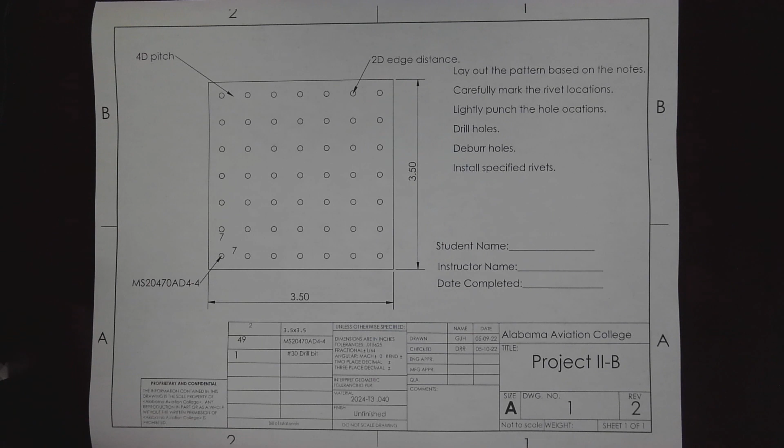We're going to take a look here at the second drawing in the second project. This is project 2B. Now this project ties into the first project. In the first project you are to cut 4 pieces of metal as precisely as possible, file them to size. Then we're going to use those projects for a couple of our rivet projects. So everything you did in the first one will apply to the second one.

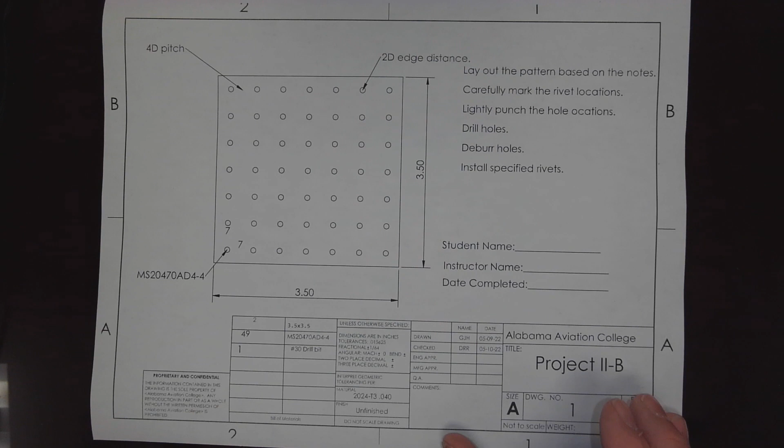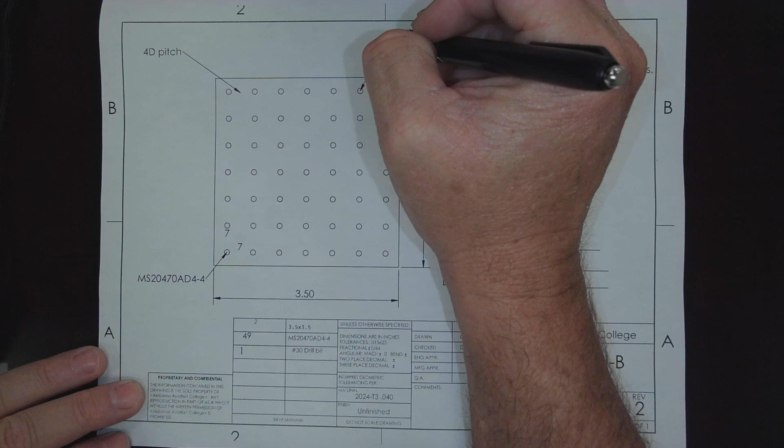And as always, before I jump in and try to key in on any one particular detail, I want to take a look at the drawing and look for any possible notes. Well, the first thing I see is lay out the pattern based on the notes. Well, we got some notes out here around our drawing, and there's some key terms that we need to look at. To start with, edge distance, ED. In this case, we got a rule of 2 diameters for our edge distance.

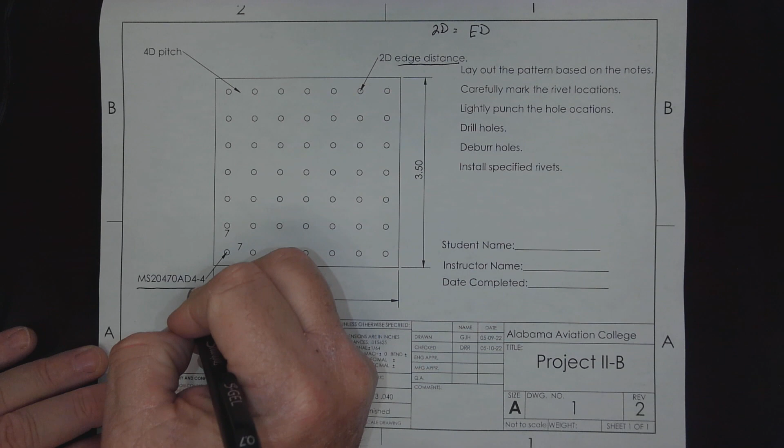Also over here, we have some information or a rule dealing with pitch. 4 diameters for the pitch. Well, that's good to know, but I can't really apply it yet. I need a tad more data. Well, look at here. We have a rivet part number. And according to this part number, this first digit, remember our diameter is always so important. A 4 rivet is the same as a 4/32 rivet.

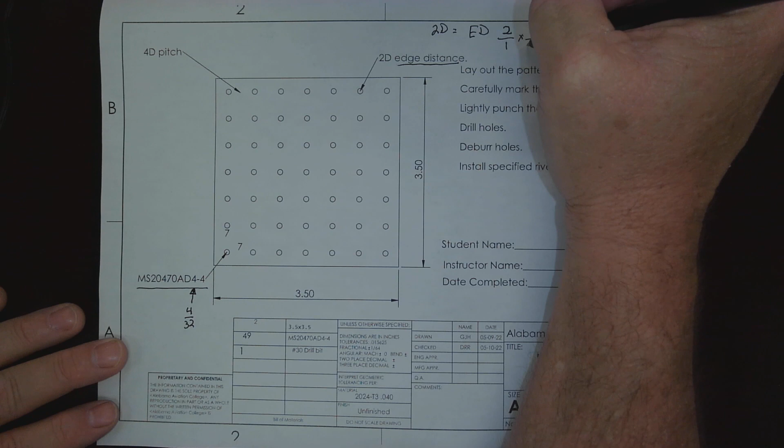Well, it just so happens that our handy dandy rulers, and it won't focus, but our handy dandy rulers have a 32nd scale. So when we apply these rules, we really don't have to convert anything. So if we know that a number 4 rivet is 4/32 and we have a 2D edge distance, well, anytime we use a whole number such as 2, it's understood that it's over 1. So we could simply multiply that by our rivet size, and by golly, we'd have 8/32.

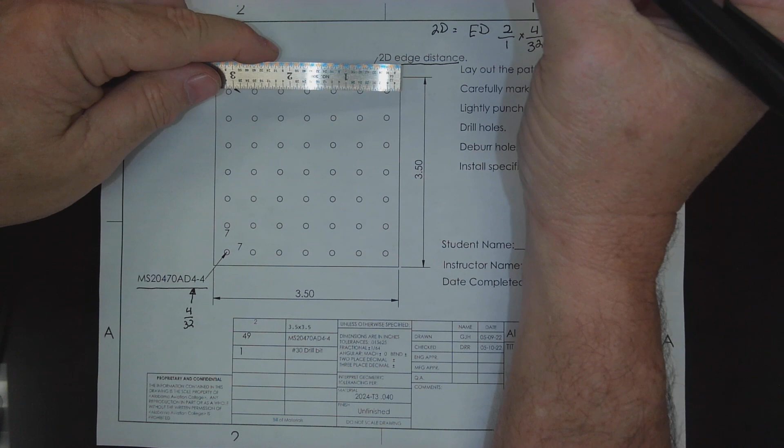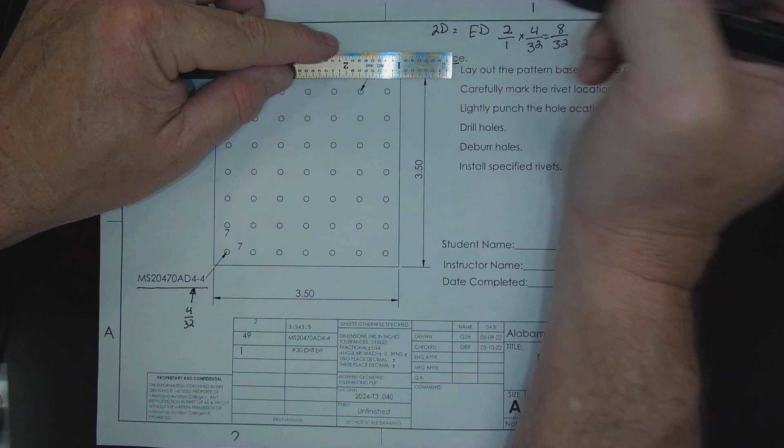Now, yes, this could be reduced to a 1/4 inch, but the fact of the matter is, since our ruler is designed to work in 32nds, we could simply place our ruler on an increment mark. I like to start with 1. Never measure from the edge of a ruler because the edge could get worn or damaged and throw your math off. It's way more accurate to measure from an increment. So I could start by laying out my edge distances at 8/32 all the way around my part.

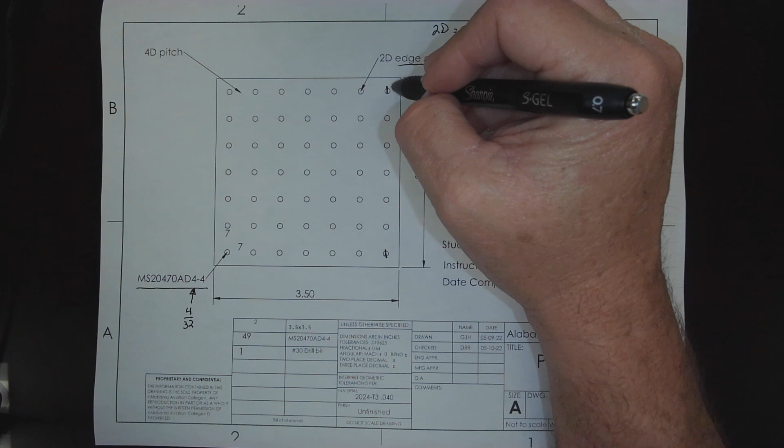If I do that, I will have established my fence. I like to call it a fence. I'm going to fence in everything that I'm going to lay out and drill. Anything closer than 2D to the edge, technically it is no good. It'll create a weak seam and the part would not be good.

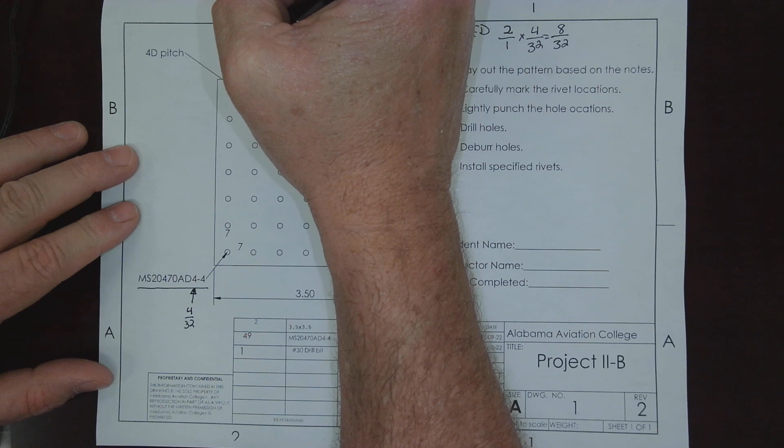The next thing I want to do is establish what my pitch would be. Well, once again, I have a pitch rule here. It is 4D, so that would be the same as 4/1 times our rivet, which is a 4/32. And look at here, I've got 16/32 for my pitch. And remember, my pitch is the space between rivets in the same row.

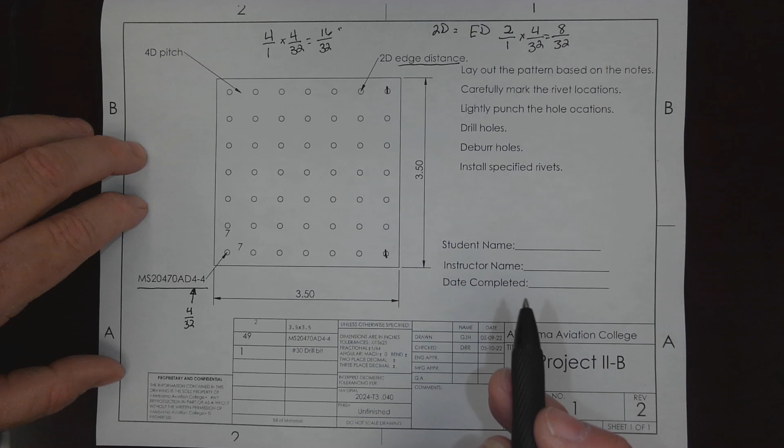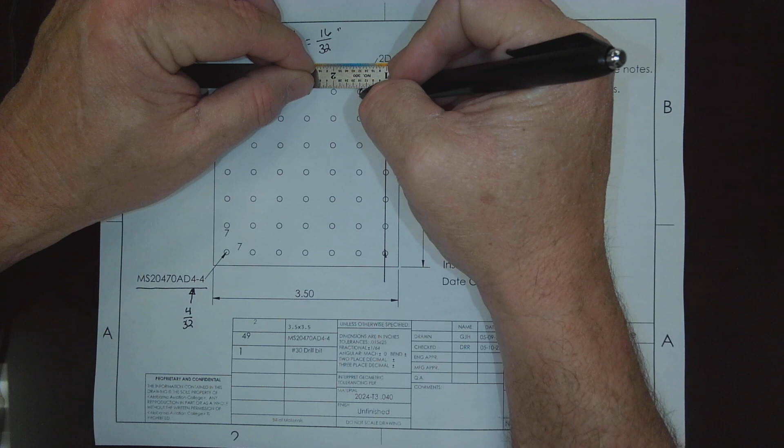So I could measure from my first line, my edge distance line, I could measure over on my blank metal. Then I could go to an increment. I'm going to cut 1 inch. I'm going to measure over 16/32, and look at this. By golly, it'll put us right in the center of where that rivet should be. I could do the same down here. We're going to measure over 4D, 4 times 4/32. That is 16/32, and I can draw a line.

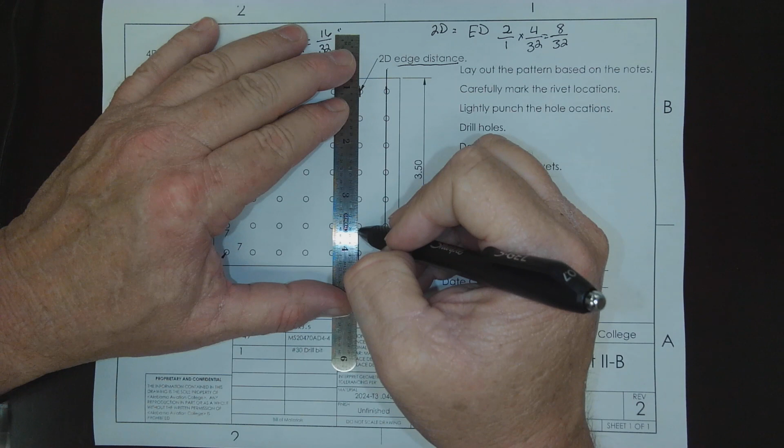So that helps us kind of get a good start. We're going to draw basically a grid. We'll do the same thing from all directions, and we'll end up with a lot of lines that'll intersect perfectly where our rivets need to be drilled and installed.

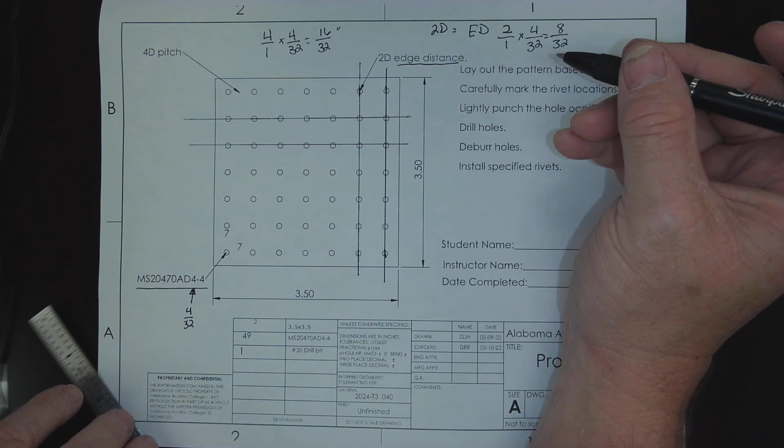Now, it's important that you take time while you're laying out these projects. Remember, Mr. Fine Point Sharpie is going to make a small enough line that we don't create a bunch of error by having a really wide mark on our metal. Well, let's look at our next notes.

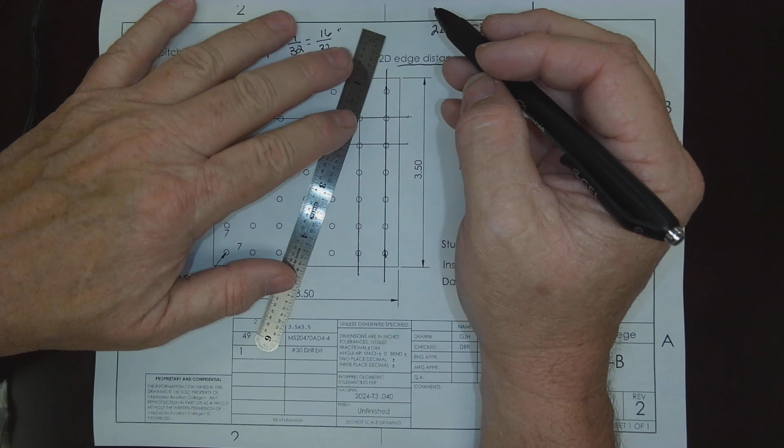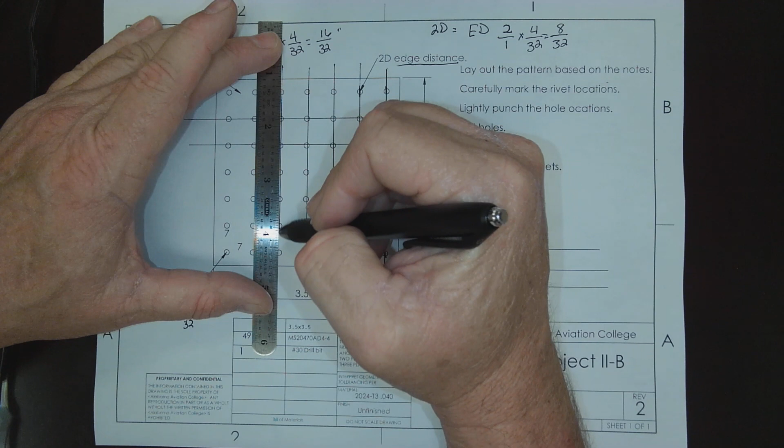Carefully mark, lightly punch. So once I lay this grid out completely in all directions, in order to help drill accurately, what we're going to do is come out at every intersecting mark, and we're going to take our little prick punch, which is part of your toolkit, and the key term when it comes to that is lightly.

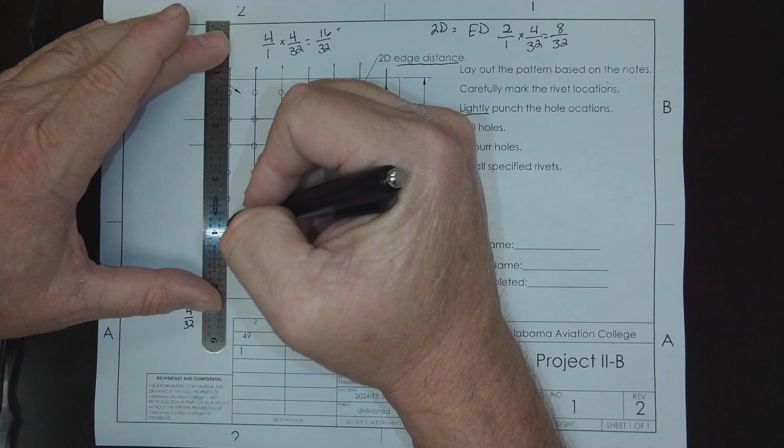See, when you put that punch down and it has that sharp end and we hit it hard, what's going to happen is everywhere you strike it, it's going to actually stretch the metal a little bit. And in doing so, all those tiny little stretches, roughly 49 of them, is going to create one great big stretch, which is going to turn your flat piece of metal into a taco looking piece of metal rather than flat. So when you get ready to punch your projects, remember, very lightly.

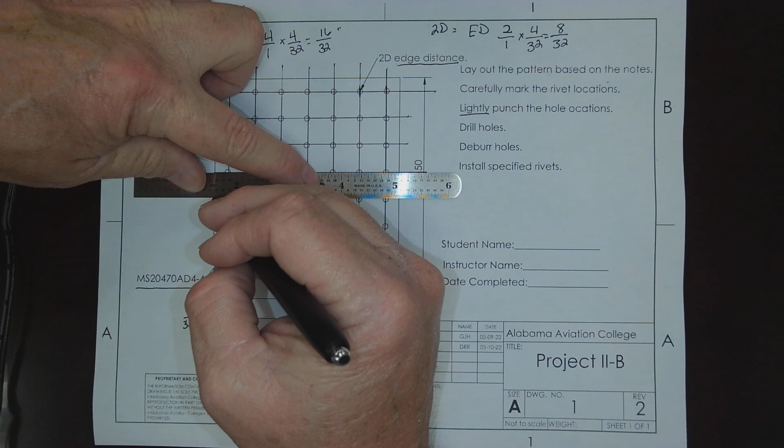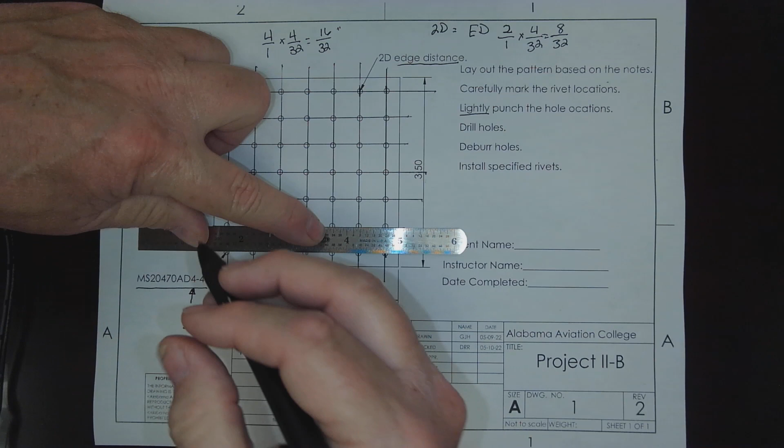All we want to do is make an impression in the metal just enough so that we can feel our drill bit when it lines up precisely where it needs to drill. So we're going to lightly punch all these, and if you start and realize my metal is curving, well, you've hit it too hard. Go easy on the metal. Come to me and I'll show you.

We'll straighten it back out a little bit, but once you have prick punched and laid out each of these marks, then we're ready to do the next step, which is drill the holes. Now, I'll do a video on showing you how to start a drill so that our hole placement is much more accurate.

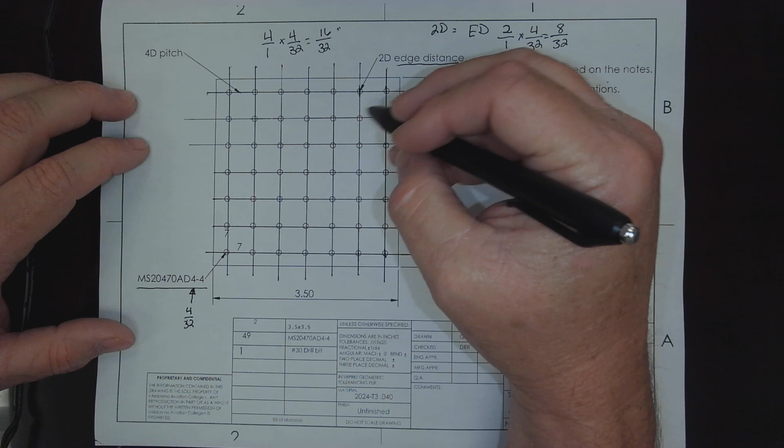Now, once we drill all of these holes out, we're going to turn around, take our deburring tool, and we're going to make sure that any little edges that are sharp that build up around those holes are smoothed out. Now, here's a note of caution. When you're deburring a hole, the idea is we want to get smooth edges.

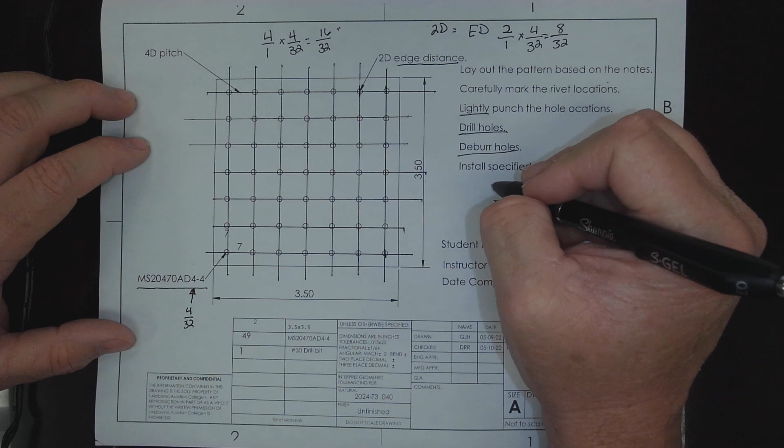We don't want to do this, and oftentimes we may overdo our effort, and we'll run our tool down until we actually remove metal and knock these square corners off. That is undesirable. The idea is just to knock the burr off the edge, not to remove thickness of the metal on those corners.

Now, this is going to be done. It shows us two 3.5 by 3.5 pieces of metal. We're going to use 470 AD 4-4 rivets, and our drill bit will be a number 30. And a number 30 is the right size bit for these 1/8 inch rivets.

So move carefully, move cautiously, and go step by step. If you need any help, make sure to get me involved. We'll get through these first projects, and your speed and your accuracy will pick up as you practice this. There's some small techniques that I can describe all day long, but it's going to be a lot more effective once you're in the lab and you're able to pick up the tools.

So look for some other videos. One of them, how to properly prick that piece of metal. The other thing is how to start and drill a really accurate hole. We're going to add those videos into this conversation, and then you can always grab me for some additional help.